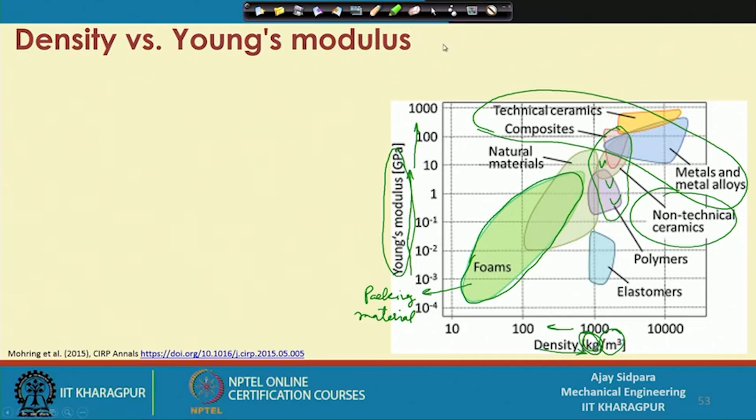The major classes of material with respect to density, specific weight and Young's modulus are shown here. We need lightweight design also, because when you are machining on a very small scale, you need frequent travel in the to and fro direction. If your workpiece is very large, or the guideways and slideways are very heavy, then quick movement is difficult.

So, for lightweight design, we need a density specific mechanical value, that is Young's modulus divided by density. This is called the density specific value, and it becomes more important, because we do not want a machine that is very heavy. Sometimes if you go in this direction, you have to go with higher density also, but we do not want to do that.

So, this is one of the criteria by which you can select different types of material which will fulfill both things, a high Young's modulus as well as a reasonable density, so that you can get the required things done.

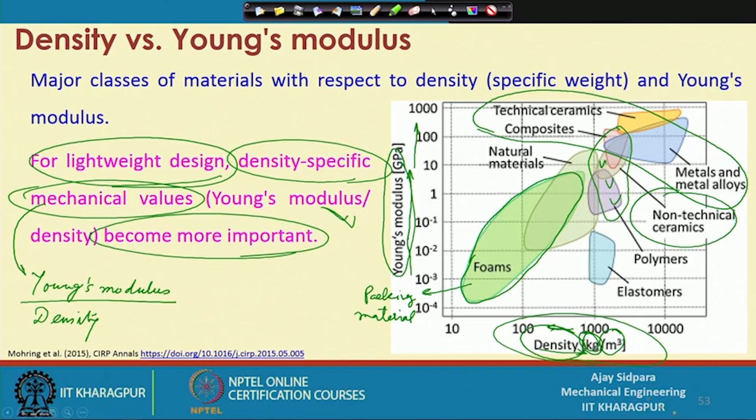Another thing is strength and the specific energy consumption. This is one more graph. Here different materials are given, and on the y axis it is strength, which is increasing; this is the specific energy consumption. So, what is the specific energy consumption? These materials are not readily available, which means you have to process these components.

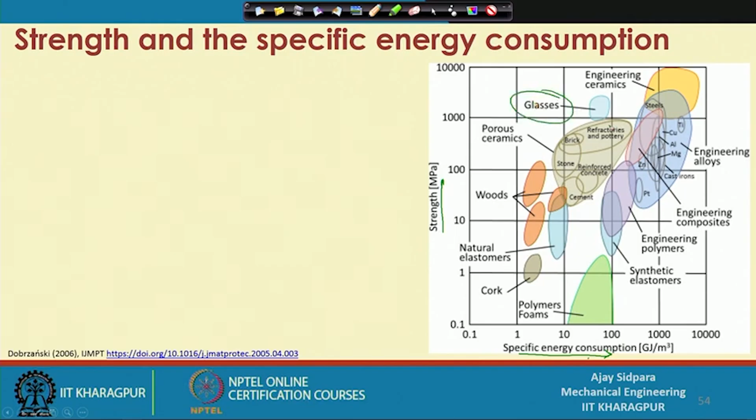Let me first define the specific energy consumption: the energy required to make the material from start to end. You start with the raw material, whether you get it through a chemical route or it is readily available in nature. Then you have to refine it, because from the raw material you have to remove or separate all the different elements.

Then you have to make sure that the content of this material is the same as the material you intend. So, refining is the second step. Once refining is over, you have to shape the component. For shaping you can do many things; machining is also available, and if it is in powder form, then powder metallurgy.

If you are getting a very small, different type of shape, then there are different processes available, right. Then you are doing forming, metal forming. Then there is casting. So, by that you are actually shaping the material. So, these all processes are for the shaping of material, shaping of material, correct.

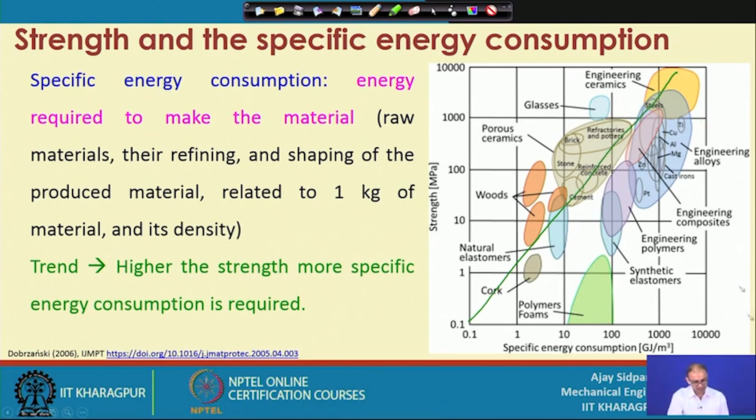So, this is the trend: the higher the strength, the more energy consumption is required, that is what this diagram shows. Just draw this; mostly it is balanced in both directions. So, this is the trend, right. So, now wall construction for a slide. Now, this is something very important, consider this example first, correct.

So, now what is this rib? Suppose you have a guideway, this is the guideway, and on the top you are actually moving one component. Suppose this is the component, and you are actually moving it by force. So, it has a weight, correct. Now consider what should be the structure of this particular guideway, and this one is the component, right. So, what should be the structure of

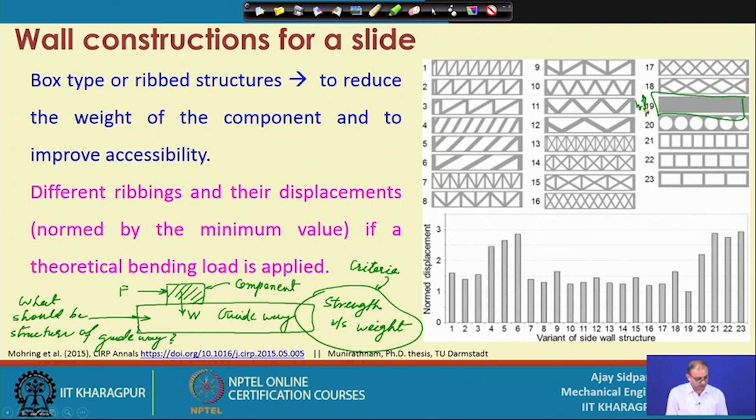the guideway, correct. So, first start with the solid one, because what is the criteria? We have to actually see the strength versus weight, correct. So, this is the criteria we have to follow. If you are making a solid structure, your weight will be very high; in this case W is very high. And then there are a lot of different options for which type of ribs you require, because these are called the ribs, whatever is shown. So, this is the rib, correct.

So, what design is important, and how do you define it? So, this is our normed displacement, because if you put a theoretical bending load at the end or at some other location, what should be the displacement? So, our objective is to reduce this displacement. Displacement should be less under loading, correct. So, now if you see this one, 19 has probably the lowest one. It is the completely solid body, but again our weight is very high.

So, now we have to find out the other shapes or configurations of this rib structure which give less displacement; let it be higher than that, but it should be within the permissible limit. Because here, whatever structure you are using, you are using less material, but you are not sacrificing the strength in a large way. So, now if you see this particular line, there are many things. 10, 11 are there, then 16, 17, 14. So, these are the structures which are important for using this type of... 16 is there, and 17 is also there.

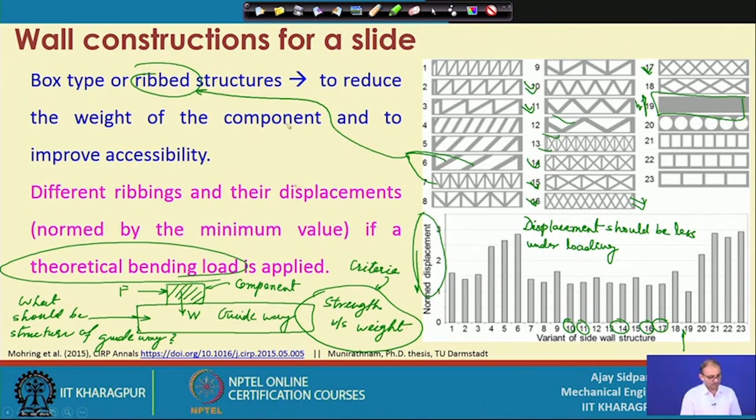Right. So, there is another category which is called the honeycomb slide structure. What is this? The machine slides are excited by driving or process force. So, there are two types of forces. One is the driving force: when you are moving an axis in this direction, you are traveling your tool, and your workpiece is located here. When traveling, you have to spend some energy to move either the tool or the workpiece, and that creates some forces. And the process force: when you do actual cutting, you encounter forces, that is called process force.

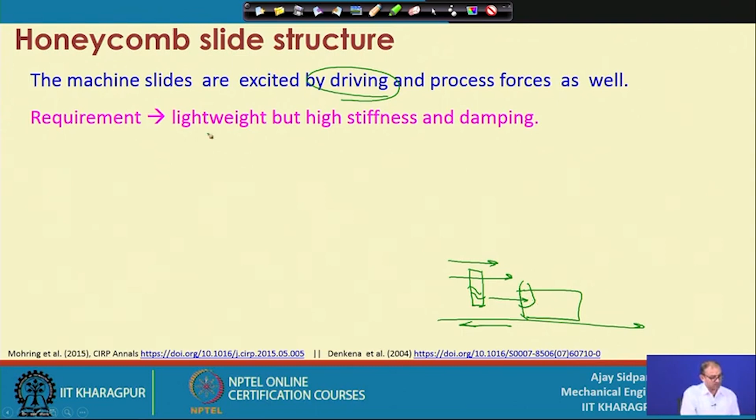So, what is our requirement? Our requirement is lightweight, but high stiffness and damping. That means your slide structure should not deform, and it should not transfer vibration to other components, or you can say it should absorb vibration. Another thing, it should be lightweight also, correct.

So, once you get this structure, then what you have to do is bolt it or weld it from both the sides, from the bottom and from the top, and then you are getting one particular structure which can be used for making the slide structure of the machine tool, correct. So, this is one of the ways of doing it. Another structure was shown in the earlier slide, but this is also very used.

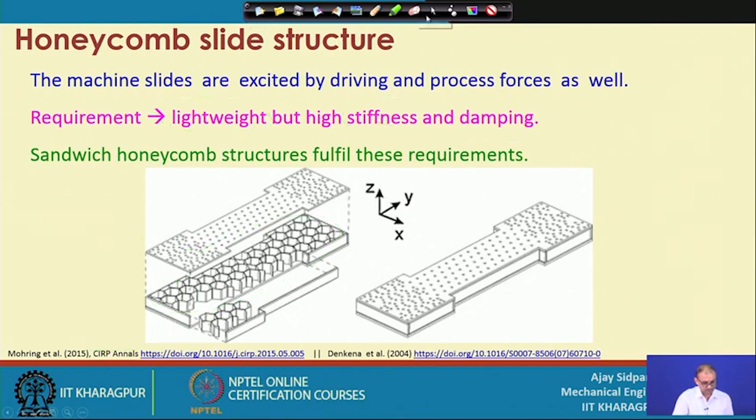Right. So, other than that, whatever we have seen, we can use different types of metal, but light metals are also available. Mostly it is aluminum alloy or magnesium alloys. So, these materials have significantly lower density compared to steel and cast iron, because we know for construction material, for the base material we prefer cast iron, for other materials we prefer steel, but the density is

high. So, your weight will also increase, and once the density is very high, machining is also not that easy, because ultimately you have to process it, or you have to shape this material. So, that will also take a lot of time and energy. So, aluminum alloy is one of the choices by which you can replace some of the components of steel and cast iron, not all.

Masses of the moving machine components can be reduced, and this is very important, because suppose you have one component here, this is the component and this is the slide on which it is mounted. And you want to do some small scale micro machining here only. So, this is the area of micro machining, right. So, here you might have a lead screw,

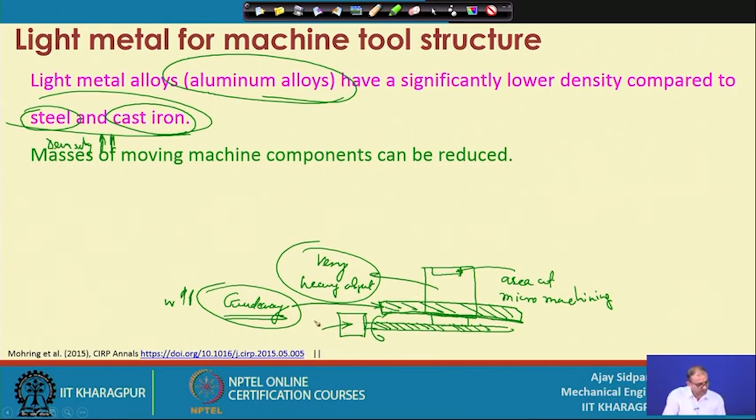So, in this case when you are moving this by lead screw, this motor will be loaded more, because it has to provide such a high torque so that it can move this object in different directions, maybe to and fro or left and right depending on your axis. So, when you are doing this, you cannot get a very fast movement, that means your feed rate will be very low.

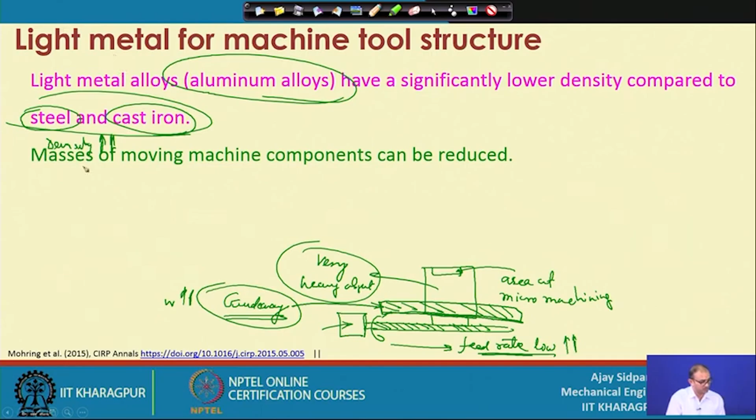Correct. So, if you are using some type of light metal, you can actually increase this feed rate to an acceptable limit, so that you can get material removal or production rate very high. Frequent movement here and there is a problem. So, one of the advantages is that you can use it for making your machine component light, so that it can move very easily without any problem.

Right. So, reducing the mass and inertia of the fast rotating tool allows shorter run up time and energy saving. So, what does it mean? Suppose you have a solid body, okay, and you want to rotate it.

Okay. So, when you rotate it, what happens? Now suppose you want to rotate it to 1000 RPM. Right now it is in a stationary position. So, to reach 1000 RPM, this is the RPM and this is the time, right, and this is the 1000. You want to reach this location.

So, when you start with a heavy body, you have to spend some time, because it will not suddenly reach 1000. So, this is the time duration required to reach 1000 RPM, right. So, this is the time.

Correct. Now, because it has its own weight, inertia plays a very important role, because when you are rotating at a high RPM, you have to spend more time to reach that location, and the same thing for stopping it also. If you continue this line and then have to stop it at 0, again you have to spend a very large amount of time. But this is more important here.

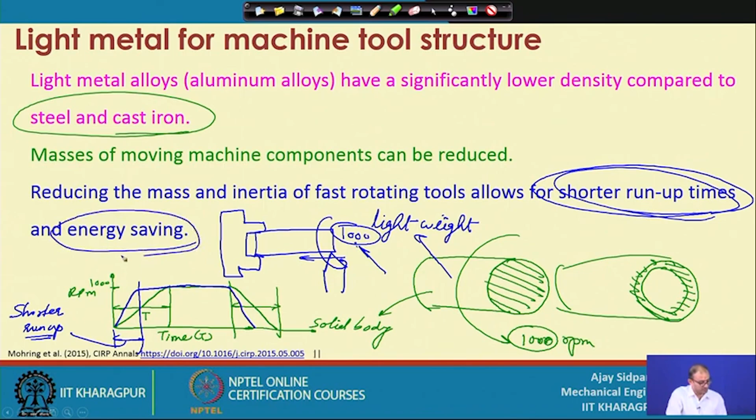So, at that time you are spending a large amount of time just waiting to reach that particular setting parameter. So, shorter run up will help you in this case, so that you can quickly reach the required parameter setting and start the machining operation. So, ultimately it is energy saving without any problem.

Right. And wall thickness can be increased in order to reduce the local strain, maintaining the component weight. Now, how will it help us in this case? Consider this is the component, let me draw it again. This is the rib, and consider your force is at this location. Okay. So, right now this is steel, or let us make it from cast iron. Correct.

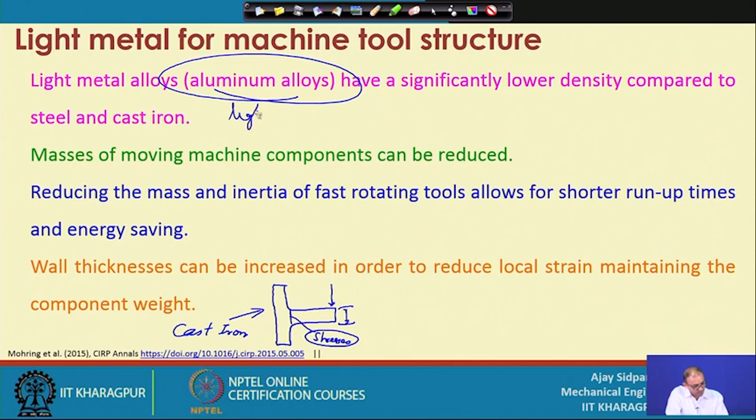So, this thickness plays an important role here, because whenever you put load, stresses will be very high at this location. Correct. So, this is cast iron. Now, if you use aluminum alloy, we know aluminum alloy is light, compared to cast iron, which is heavy. So, what you can do is increase the thickness of the rib. Now, you provide the same force.

Now, this is T1 and T1, and this is T2 and T2. So, T2 is higher than T1, correct. So, in this case you can increase the wall thickness here to reduce the local strain. So, now your thickness is a little bit more compared to the earlier case, so your stresses will be expectedly low,

maintaining the weight of the component, because we know the density difference is high. So, even if you increase this thickness, your weight will not increase at such a high rate, because there is a density difference. So, the weight will be the same for both cases. That is W1 equal to W2, even though you are increasing the thickness of this part.

So, that is one of the advantages of using lightweight metal, but you can use it for some of the components only, not all, because these materials are not very useful for some components and can be harmful. So, at that time you need to use steel or cast iron to get things done.